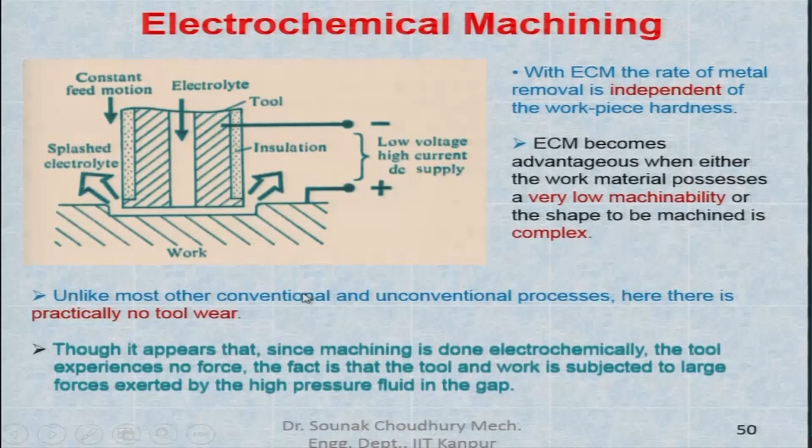This is more broadly the electrochemical machining setup, but otherwise it is the same as shown before. The only difference is that it shows in detail how the electrolyte is recirculated, taken from the tank, and how it is recirculated after being filtered and so on. You can see it from here.

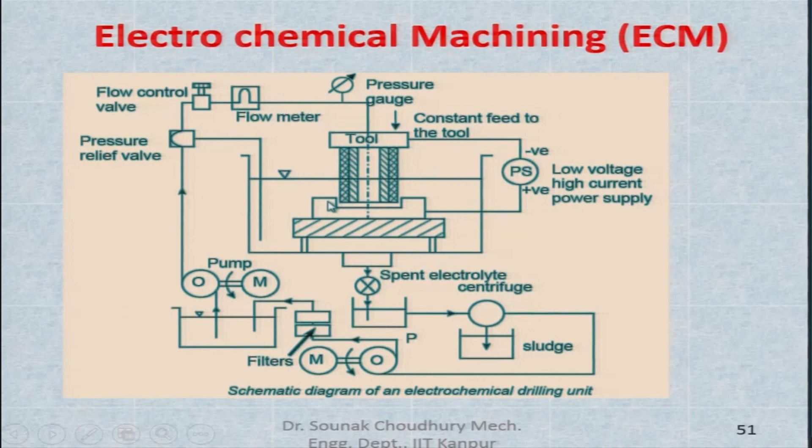Now, process parameters in gist, it is all been said, but this is in gist. Only thing is that electrolyte, we did not say that either you can use sodium chloride, salt water, or NaNO3, sodium nitrate.

Temperature will normally be 20-50 degree centigrade. Flow rate is 20 liter per minute per 100 ampere of current, and working gap is 0.1 to 2 millimeter.

Overcut could be 0.2 to 3 millimeter. Overcut, as I already said, is when the hole is not exactly straight, and the surface roughness is about 0.2 to 1.5 micron. So you can see that the surface roughness is good.

Electrode, that is the tool material, can be copper, brass or bronze, because the tool does not wear out. So it can be a soft material like this.

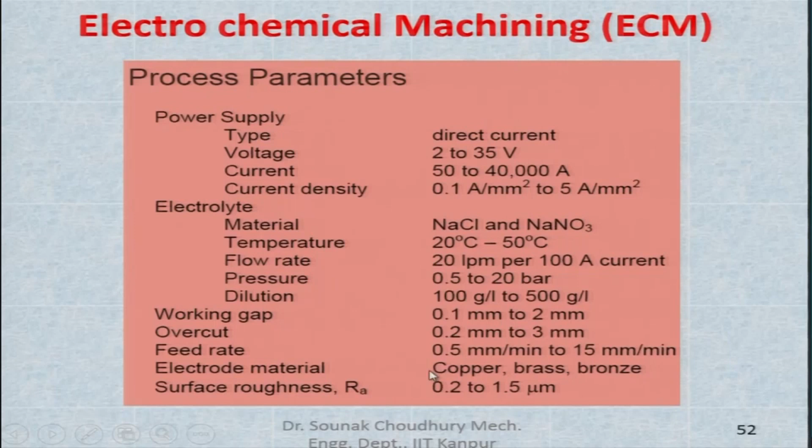Now, electrochemistry, I will not go into very details, this follows Faraday's law of electrolysis. Material removal is proportional to the current, time, and E. So E is the gram chemical equivalent, which is A by Z, and you can find out the material removal of the process.

Since this follows Faraday's law, F is the Faraday's constant, which will be given in the handbook. So if you find out the time, the gram chemical equivalent can be found out from this, the atomic mass of the anode and the valency of the dissolution of the anode.

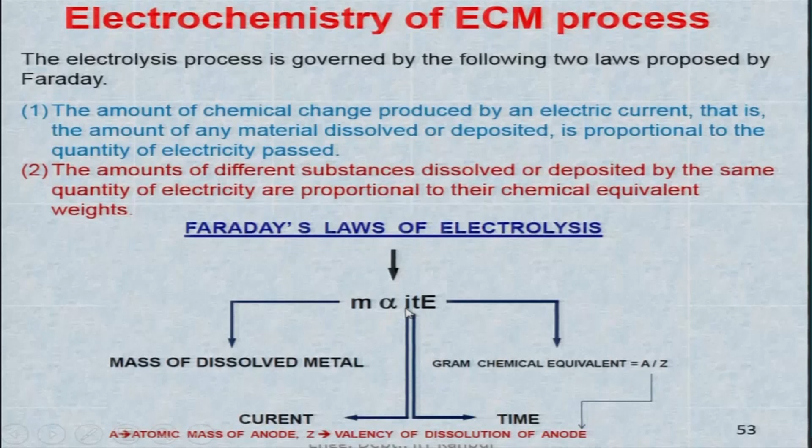So the E will be known, time you know, you can find out what is the current which is going through, and divide that by Faraday's constant, that would be the material removal, and the material removal rate will be I times E divided by F, because this is divided by T. So T is getting cancelled here.

Well, MRR also can be obtained like that, but here it is not very important, we are not going into details. So what is important for you to understand is this is I E by F, that way you can find out the material removal rate.

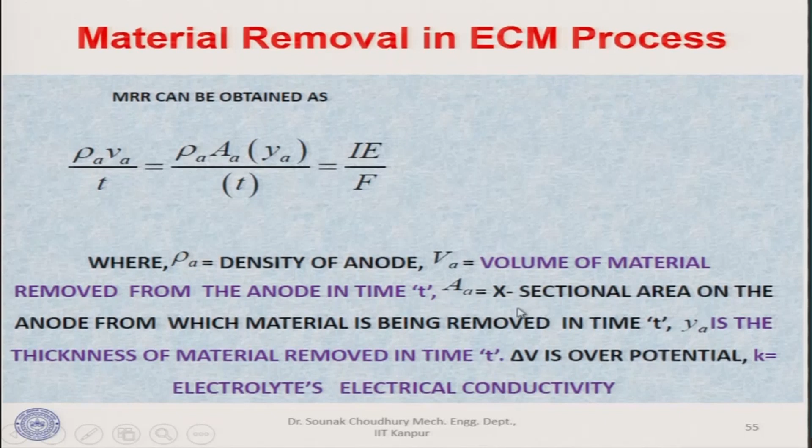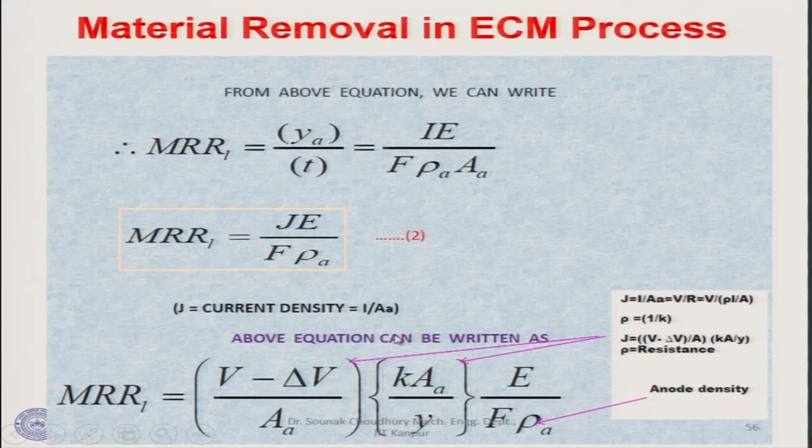This is more important, because through the density also you can find out. So this is the density of the anode, volume of material removed from the anode in time, and area. This in detail you can simplify and finally find out how the material removal rate can be expressed.

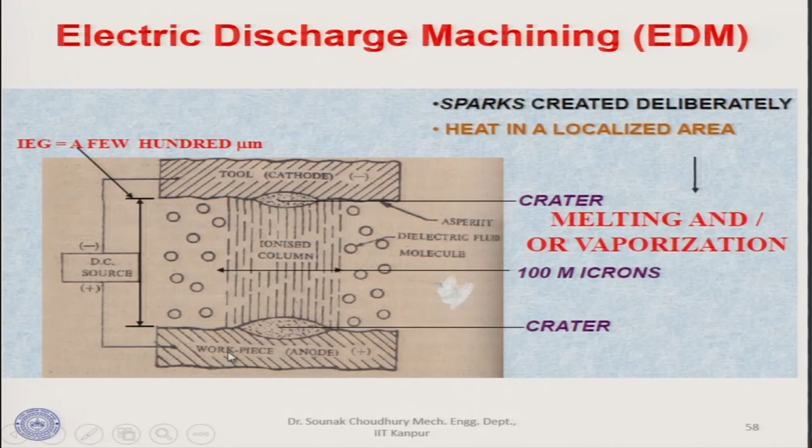Between these two there is an ionized column which makes a flow of avalanche of electrons from the tool to the workpiece side, as the current is passed between the tool and the workpiece. So here is more detail.

What happens is when proper current is established, the electron moves from the tool at a certain speed towards the workpiece. On the way to its movement, this meets the ions of the dielectric fluid or molecules of the dielectric fluid, dividing these molecules into ions and electrons.

So those electrons again rush towards the workpiece, and on the way they meet the molecules of the dielectric fluid, breaking them into ions and more electrons. So that way the electrons keep on getting formed. And ultimately there will be an avalanche of electrons.

And that avalanche of electrons, while moving from the tool to the workpiece side, will look like a spark. So that creates a very high temperature, and that high temperature at a very tiny spot of the workpiece will melt and can evaporate the workpiece.

Mechanics, I have already explained to you, that the local gap between anode and cathode varies due to the asperities. So electrostatic field is created at the minimum gap due to the voltage. What we mean is suppose this is the tool, and this is the workpiece, in between there is a gap, so this distance is the nearest distance.

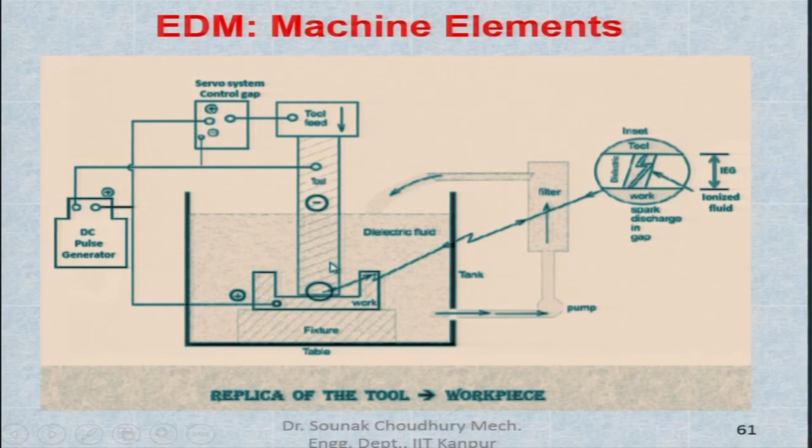Here, if we compare it with electrochemical machining, we have seen that nothing happens with the tool there, no material is removed from the tool. But in the case of EDM, electro discharge machining, the tool wears out because the heavier ions hit the tool. So in that case the tool also wears out, of course much less than the workpiece, but nevertheless, in comparison to electrochemical machining, in electro discharge machining the tool does wear out.

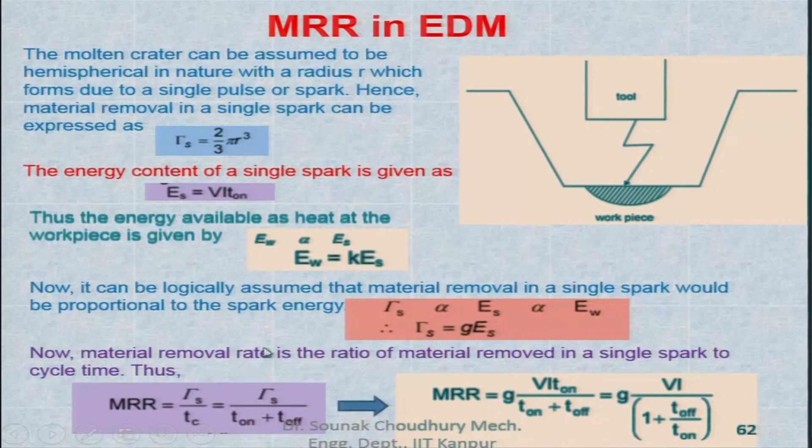Here is the material removal rate in the EDM process. We may not go through this in great detail, but there are simple formulas readily available in the textbooks that can be used for finding out the material removal rate, through the energy available as heat at the workpiece. Finally, you can find the formula through this energy by equalizing, and this formula, with the given parameters, lets you find the material removal rate. We are not going into that detail because it is not under the purview of this course. Here I have already shown this for electrochemical machining.

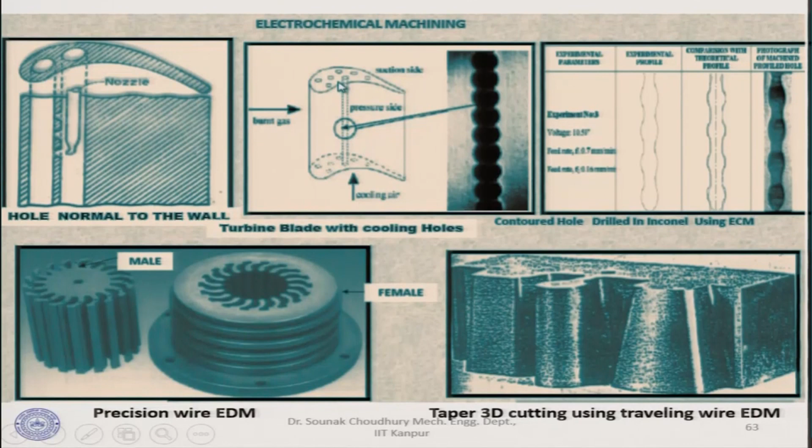Here it is, I am repeating, because for electro discharge machining this is what we can actually get, and this, as I was telling you, is for electrochemical machining. If you remember, I showed you the turbine blades where holes of very complicated shapes can be drilled.

Now the advantages: any material that is electrically conducting can be machined by electro discharge machining. Materials regardless of their hardness, strength, toughness, or microstructure can be easily machined by EDM, because these properties no longer stand in the way—it is only the avalanche of electrons, and the temperature is so high that any material can be melted and evaporated, up to 15,000 degrees centigrade, on a very tiny spot. Therefore, in the vicinity you will not have any kind of heat affected zone, because it happens for a fraction of a second at a very tiny zone, and the material immediately goes off and the spot cools down while the spark happens on another spot, where, as I said, the distance between the asperities will be minimum.

The tool and workpiece are free from cutting forces. Edge machining and sharp corners are possible in the EDM process.

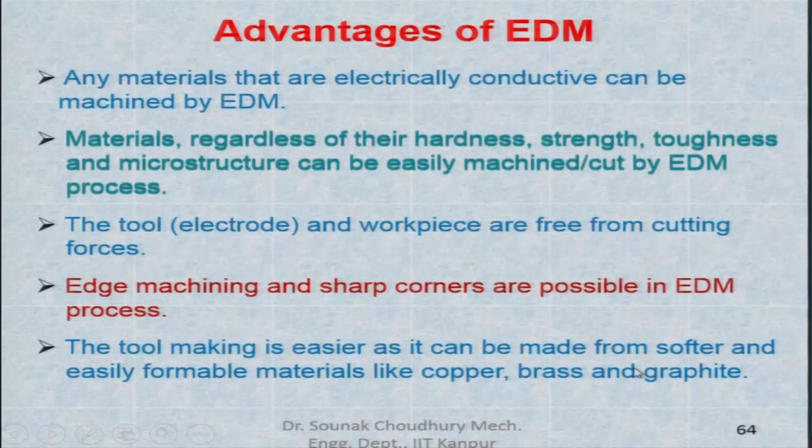Tool making is easier as it can be made from softer and easily formable materials like copper, brass, graphite. Like in case of ECM also we said that copper and brass can be used as the ECM tool material. But here graphite can also be used for making the tool in EDM. These are the other advantages.

The process produces good surface finish, hardened workpieces can also be machined. EDM is a burr free process. When EDM is used there is no burr formed. Hard die materials with complicated shapes can be easily finished with good surface finish and accuracy.

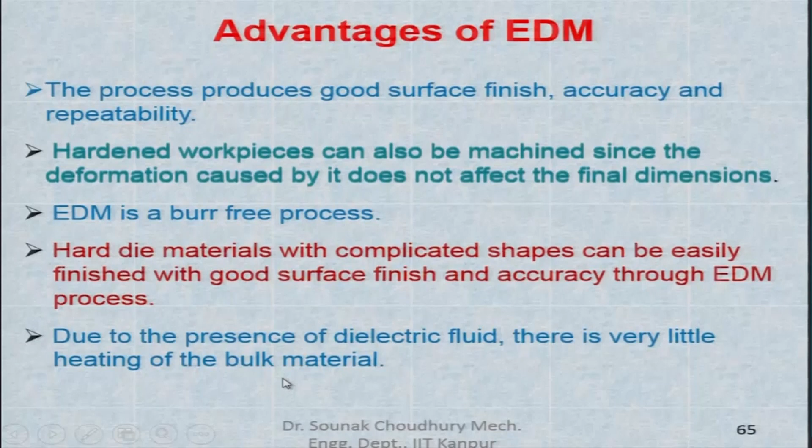Due to the presence of dielectric fluid, there is very little heating of the bulk material. As I said already, because it happens at very high speed, the time taken for the spark to happen is very small, about 1 upon 1000 in seconds.

Limitations of EDM: the material removal rates are low, making the process economical only for very hard and difficult to machine material. It takes longer time, of course. Recast layers and micro cracks are inherent features of the EDM process.

The recast layer is a hard layer, also known as the white layer. This is a disadvantage of EDM, because when the process happens some of the molten material comes and precipitates on the surface, forming this recast layer which is hardened and has to be removed. Now, the EDM process is not suitable for non-conductors.

Rapid electrode wear makes the process more costly. This I have already mentioned, the tool wears out. The surface produced by EDM generally has a matte type appearance requiring further polishing to attain a glossy finish, meaning the surface finish is not very good.

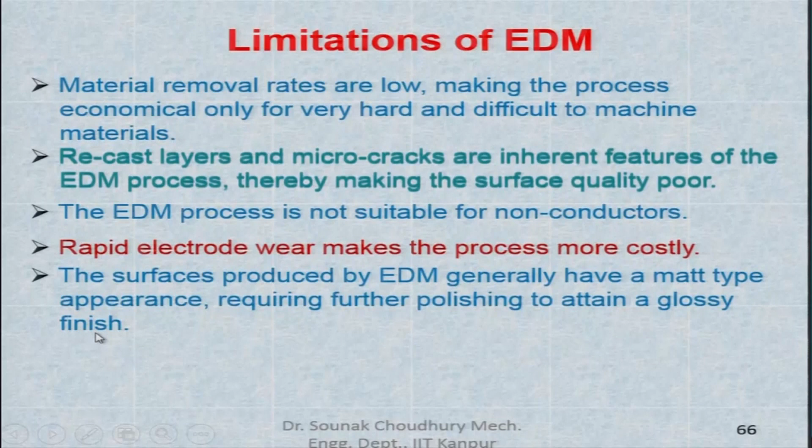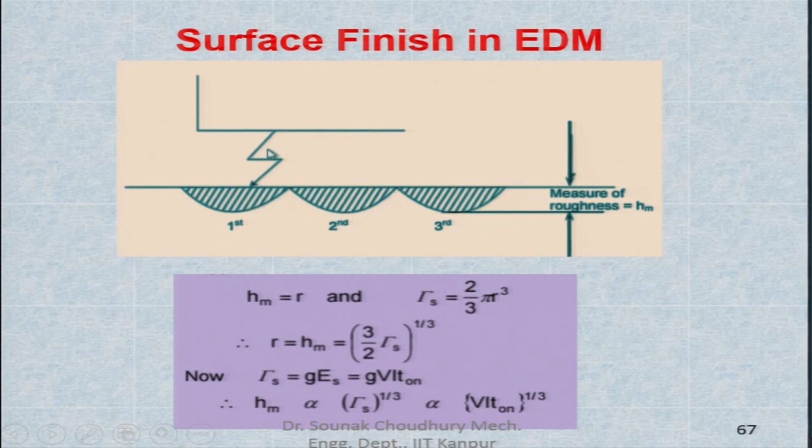This is the surface finish in EDM. This is how the surface is produced, because these are the sparks which happen in spots. This is, of course, highly exaggerated.

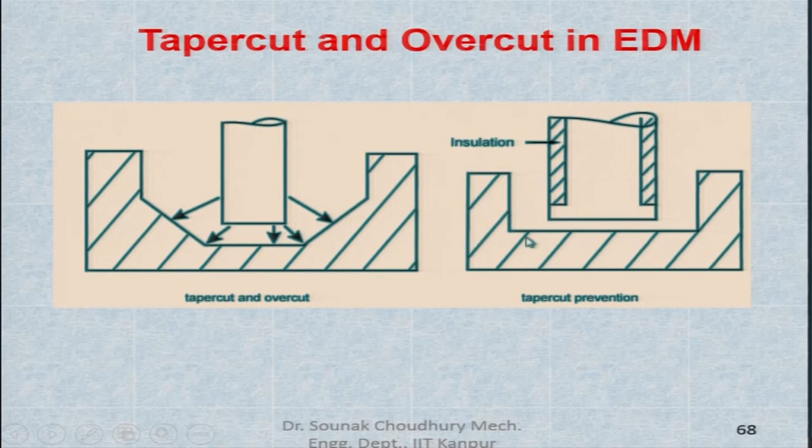Applications of EDM include hardened steel dies, stamping tools, wire drawing and extrusion dies. Then we have header dies, forging dies, intricate mold cavities, and such parts are made by the EDM process. Of course the process is slow, but nevertheless these materials are very hard, very tough.

So by EDM it is convenient to produce these parts. The process is widely used for machining exotic materials used in the aerospace and automobile industries, simply because those materials are hard to machine by conventional machining or any other process. EDM is a non-contact type of machining process.

It is very well suited for making fragile parts that cannot take the stress of machining. As I said already in the introduction, as a drawback of conventional machining, you cannot machine a very fragile part. But here there is no contact between the tool and the workpiece, and therefore fragile parts can be machined.

Deep cavities, slots and ribs can be easily made. Micro EDM process can successfully produce micro pins, micro nozzles, micro cavities and so on.

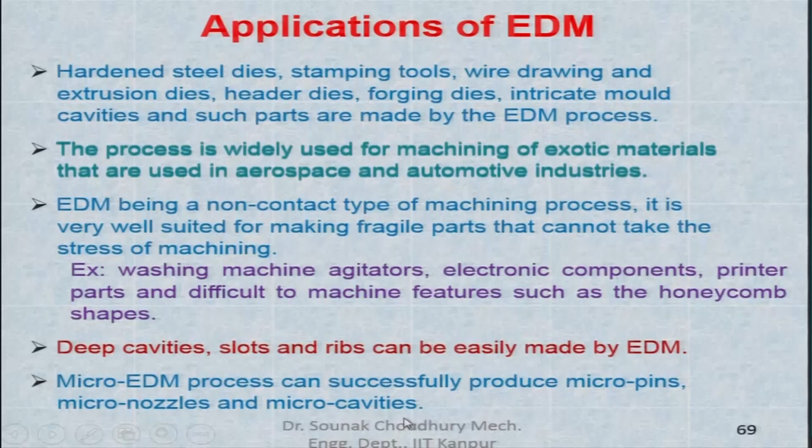This is a type of EDM process called wire EDM, because a wire is used as the tool, and that wire is not stationary but continuously moved. So the wire is used as a tool, and this is the workpiece. In this case, if we move the workpiece or the tool, a contour can be machined, which is difficult in case of normal EDM.

This is a special form of EDM that uses small diameter wire as electrode to cut a narrow kerf. Here you can see there is a spool, and the dielectric fluid is passed through the nozzle. This is the wire electrode, this is the work, and the cutting path is here. The feed motion can be in this axis or that axis, or jointly moved to make a very complicated contour.

Operation of wire cut EDM: as I already told you, CNC can be used for motion control, for example for very complicated shapes. While cutting, the wire is continuously advanced between the supply spool and the take up spool.

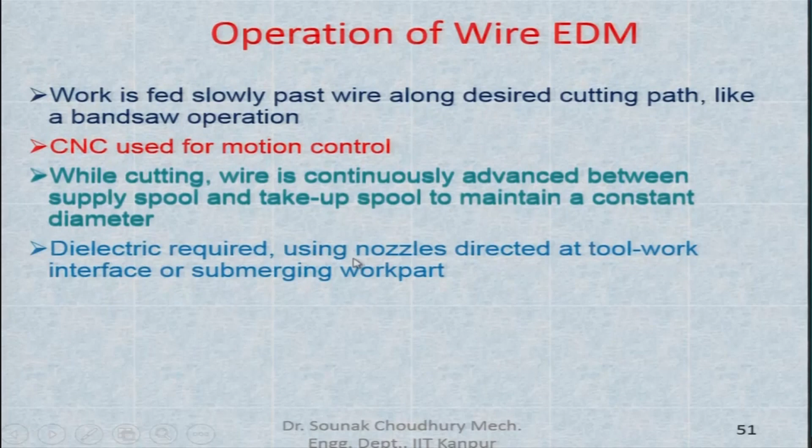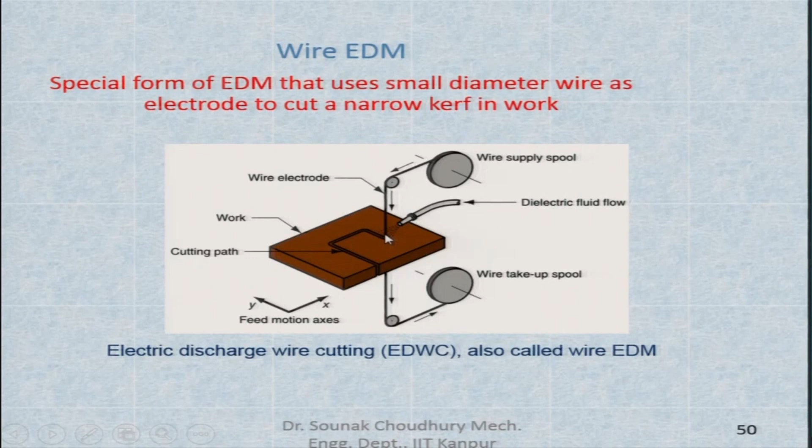The dielectric required is supplied using nozzles directed at the tool-work interface, or the work part can be submerged. So it can be either submerged, or the dielectric fluid can be injected in the working zone. This schematic is an enlarged part showing the kerf. This is the wire, and the slot is being made, you can see this. This is the overcut.

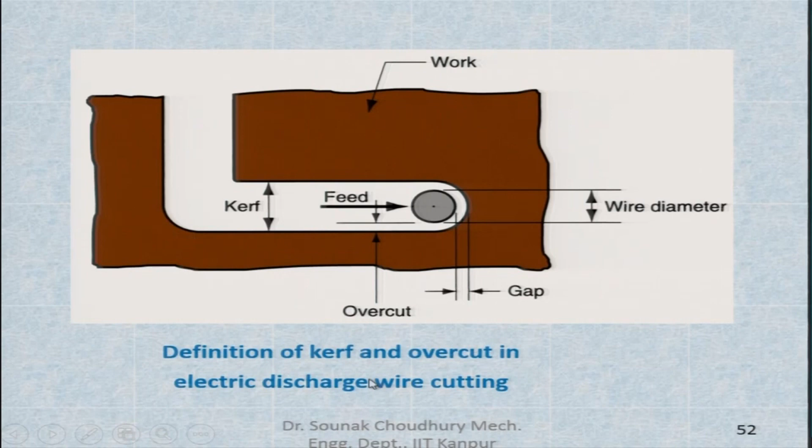Application is ideal for stamping die components. Since the kerf is so narrow, it is often possible to fabricate punch and die in a single cut. From a square plate, if you cut it in the middle with a complicated shape, that is the punch, and the rest can be used as a die. Other tools and parts with intricate outline shapes, such as lathe form tools, extrusion dies, flat templates, can also be made using EDM.

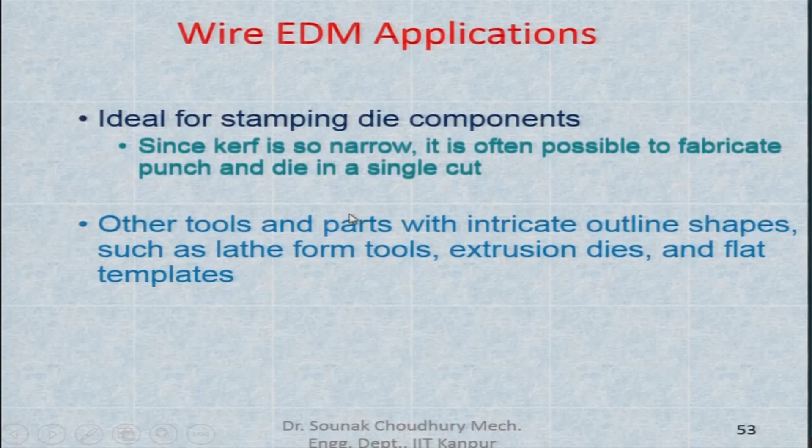Next is the thermal micromachining processes. Electro discharge micromachining is one of them. Now, electro discharge machining we have already seen. Electro discharge micromachining is, in one word, the miniature version of electro discharge machining, because the principle remains the same - how an avalanche of electrons is generated, dividing the molecules of the dielectric fluid into ions and more electrons, and so on.

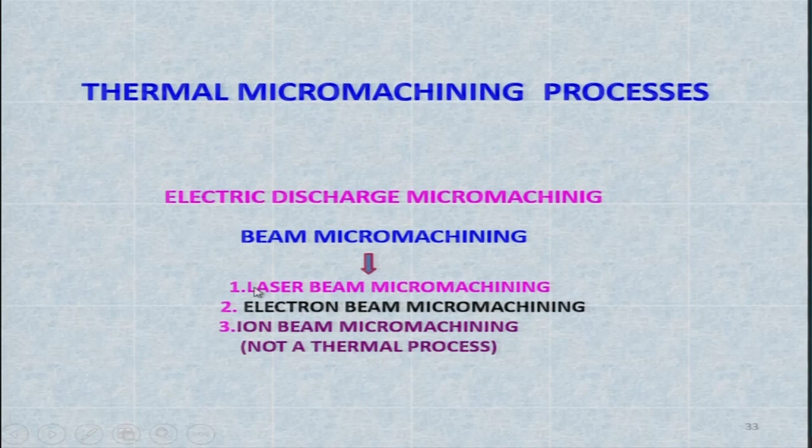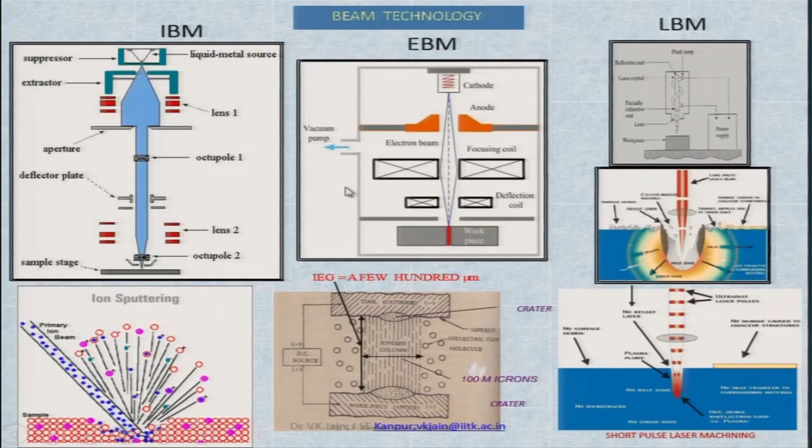I will describe some of them, for example electron beam machining. In electron beam machining, there is an electron gun with a hot tungsten filament that emits electrons. When high voltage is passed through this circuit with the hot tungsten filament, the electron beam is emitted.

That electron beam can be concentrated and moved with the help of the electromagnetic lens and the beam control coil. The electromagnetic lens concentrates the beam of electrons, and the beam control coil moves the beam if a contour has to be machined on the workpiece surface.

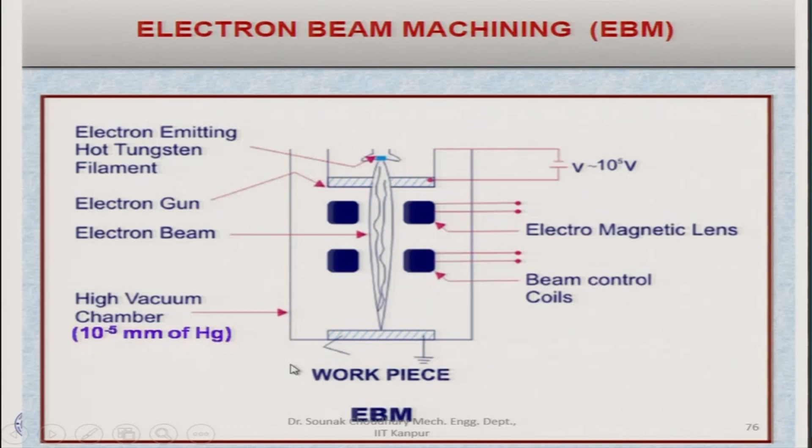Electron beam machining has to be done in a high vacuum chamber, about 10 to the power minus 5 millimeter of mercury, because otherwise the electron beam will collide with molecules of the air and its energy is lost. This is a disadvantage of electron beam machining - each time you make a new part, you have to open the chamber, take out the machined part, put in the new part, and then recreate the vacuum, which is quite high at 10 to the power minus 5 millimeter of mercury. So this process becomes a little inconvenient and expensive.

As I have already told you how it is done, these are the quantitative measures: the electrons are accelerated to about 75% of light speed.

The beam is focused through the electromagnetic lens, reducing diameter to as small as 0.025 millimeter. This is the spot. On impinging the work surface, kinetic energy of electrons is converted to thermal energy of extremely high density, which melts and vaporizes material in a very localized area.

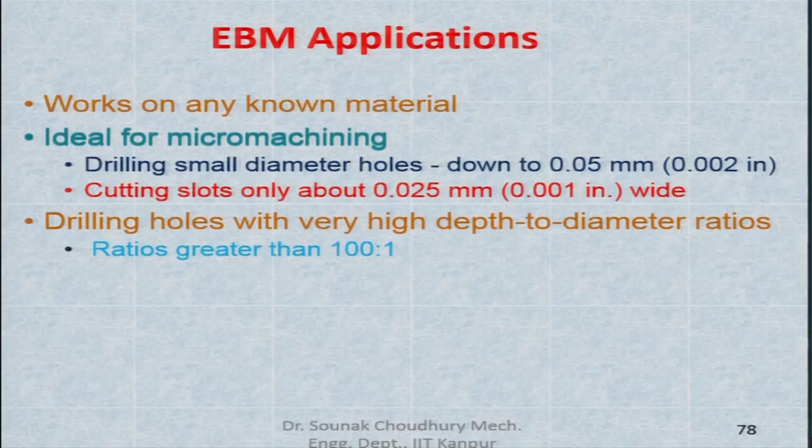This application is ideal for micro machining: drilling small diameter holes down to 0.05 millimeter, cutting slots about 0.025 millimeter wide, and drilling holes with very high depth to diameter ratio, with ratios as big as 100:1. This is an advantage over conventional machines, where it is very difficult.

Laser stands for Light Amplification by Stimulated Emission of Radiation. The laser converts electrical energy into a highly coherent light beam with monochromatic properties, theoretically single wavelength. This is different from electron beam machining in that a laser gun can be used in air, since air molecules do not interfere with it.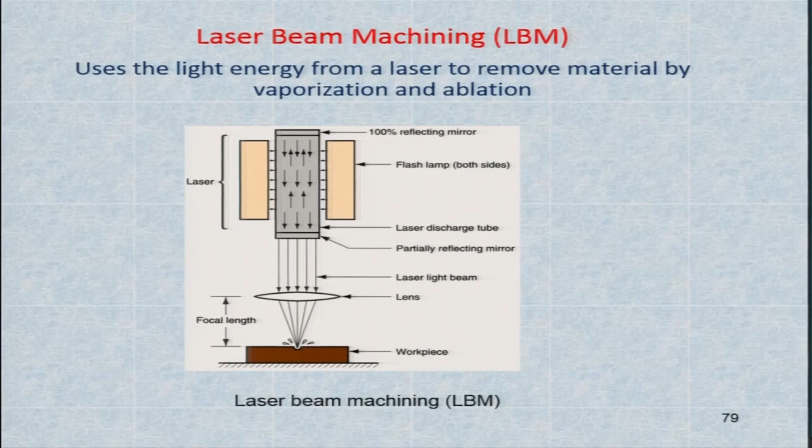This laser light beam is concentrated by the lens at a very tiny spot where the energy is so high that it creates very high temperature, melting and evaporating the workpiece material, irrespective of its strength or hardness.

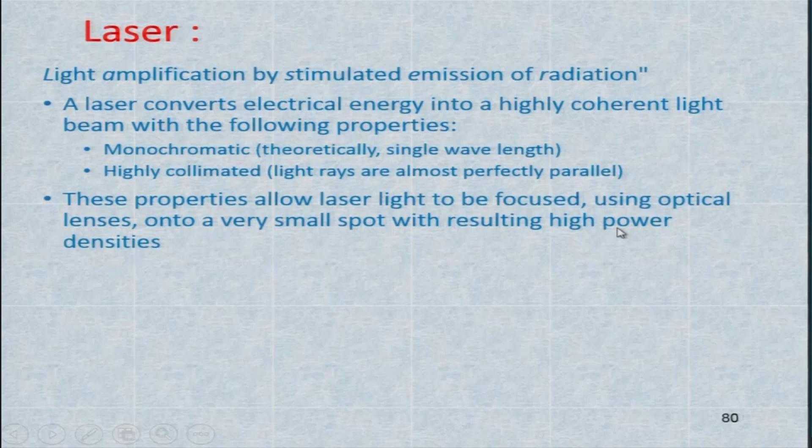These properties allow the laser light to be focused using optical lenses onto a very small spot, resulting in high power densities. Applications include drilling, slitting, slotting, scribing and marking operations.

Drilling small diameter holes down to 0.05 or 0.025 millimeter, generally used on thin stock because such materials are otherwise very difficult to machine, being thin and fragile. Work materials include metals with high hardness and strength, soft metals, ceramics, glass epoxy, plastic, rubber, cloth and wood, all suitable for laser beam machining.

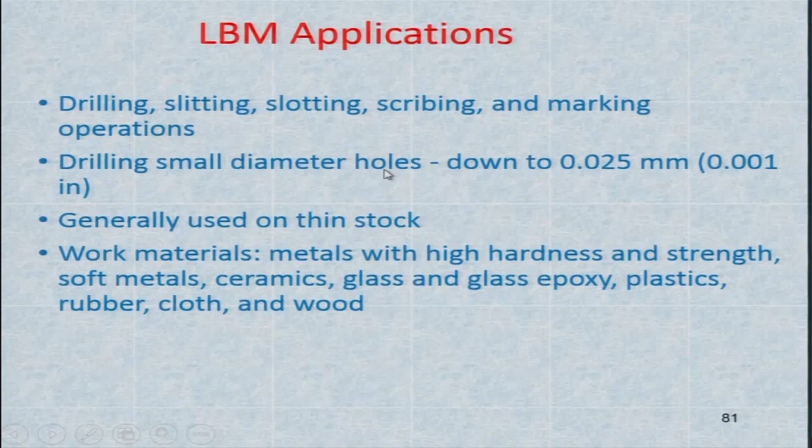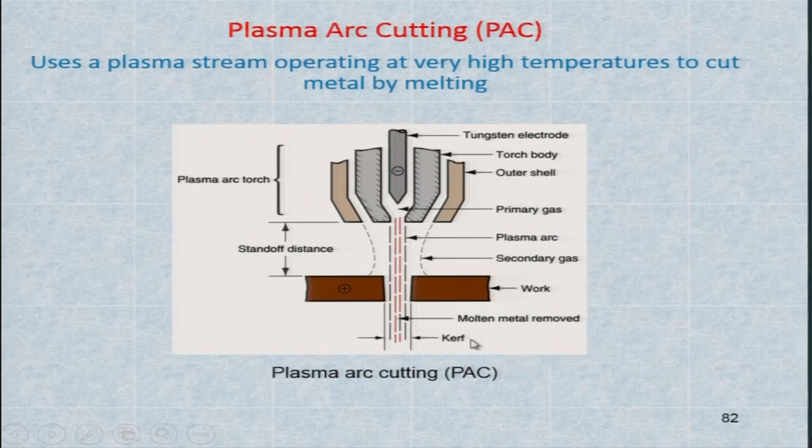Plasma is a superheated, electrically ionized gas, with temperature ranging from 10,000 to 14,000 degree centigrade. At this temperature any material can be melted and evaporated.

It really evaporates the material because of such a high temperature, but this occurs at a small spot. So, once again, in the vicinity there is no heat affected zone.

Plasma is generated between the electrode in the torch and the anode workpiece. The plasma flows through a water cooled nozzle that constricts and directs the stream to the desired location.

So, these are the processes that I basically wanted to discuss with you, to give you a basic idea about unconventional or non-traditional machining.

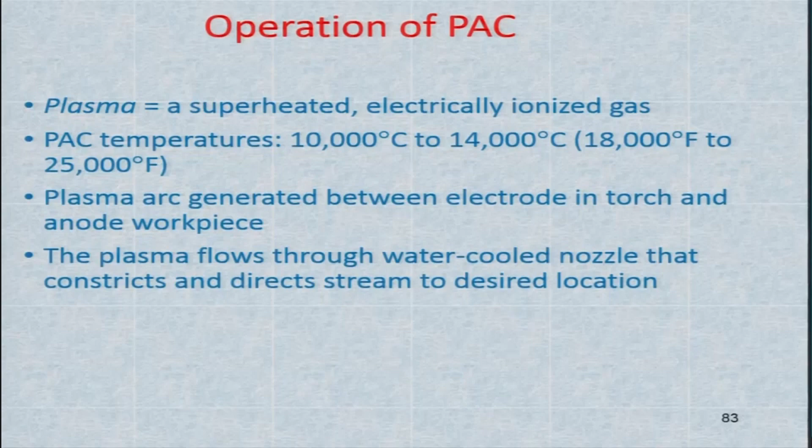Now we will start a new chapter in this lecture series. This topic is computer numerical control. Let me give you a preamble about computer numerical control.

We will be having hands-on training in the laboratory. I will take shots in the laboratory and show you the entire video of how the programming can be made and how the machines can be operated using those programs. I will go into details, and also show you in a PPT separately before we go to the lab.

But here what we are going to discuss is what NC and CNC machines are. What is the difference between them? And why do NC and CNC machines come into the picture?

Why do we need them? In conventional machining machines, there is a prime mover that gives movement to all the parts - it moves the spindle, the lead screw for feed, and the feed motion is taken from the gear train in the headstock. So there is one prime mover, and you don't have much choice of the relative movement between the tool and the workpiece.

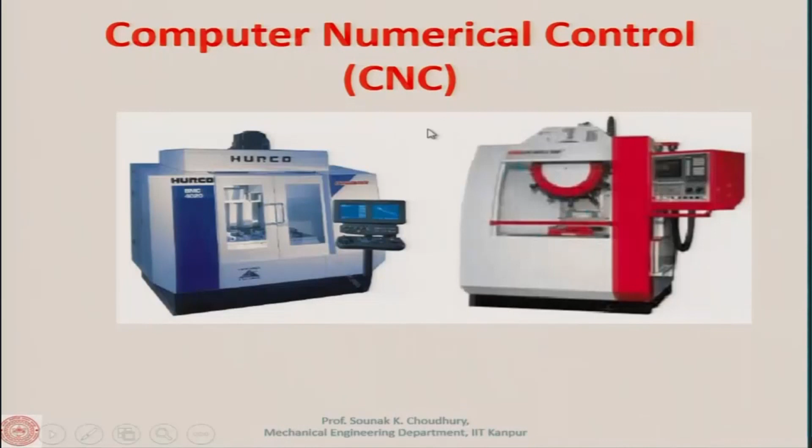So in computer numerical control, the manufacturing operator already has much less responsibility, much less work - he will only be an observer. He will put the numerical data into the numerical controller using the numerical control code, and this will drive the machine to produce the part.

This is the action - the controller is the brain, it will read the data the operator is putting in, interpret what the data means, and by interpreting this, send a signal to the hardware, that is the machine, telling it what to do.

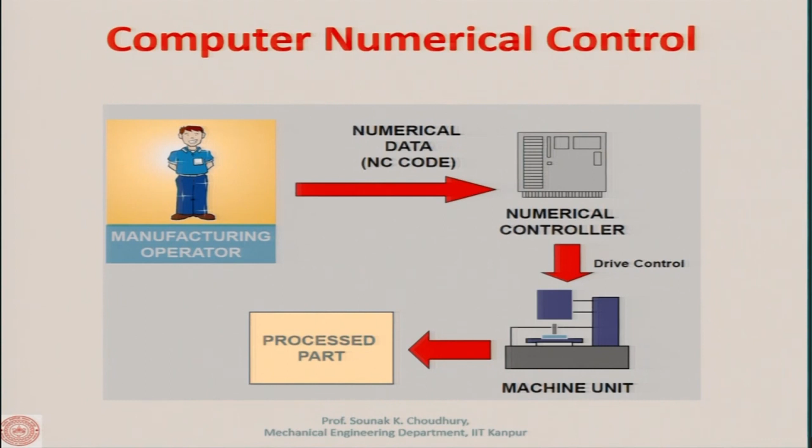Now let me tell you how this flexibility can be obtained. In case of NC and CNC machines, we can have flexibility, meaning we can change the configuration of the parts. This is possible because instead of one prime mover, we can have motors for each of the 3 axes X, Y, Z. Nowadays there are 5 axis machines with more axes, but let us consider to begin with the 3 axis X, Y, Z.

If we have 3 different motors for independent movement of each of these axes X, Y, Z, then we can move them as per our requirement.

We can move them one by one, we can move them simultaneously, or we can move two of them simultaneously to make any kind of surface or relative movement between the tool and the workpiece. That will make the flexibility possible. That means we can have changes in the configuration of the parts, we can make any kind of parts using the same machine, which differs from conventional machines.

If you look at the history, around 1949, John Parsons and the US Air Force defined a need to develop a machine tool capable of machining complex and close tolerance aircraft parts with repeatability. About 1959, the Massachusetts Institute of Technology announced Automatically Programmed Tools as a programming language. They also came up with the concept of computer numerically controlled process and offered automatic programming.

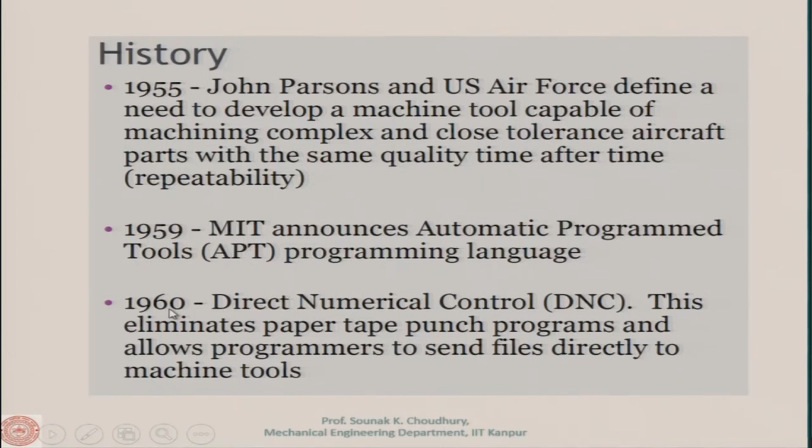This is direct numerical control, and the milestone for this is 1960. Prior to that, paper tape used to be given to each of these machines individually. This was the first step, around 1960, where the program is directly given to the machines. There is a bulk memory program for all the machines, and individually the machines can be given their programs. You do not have to have a standalone system.

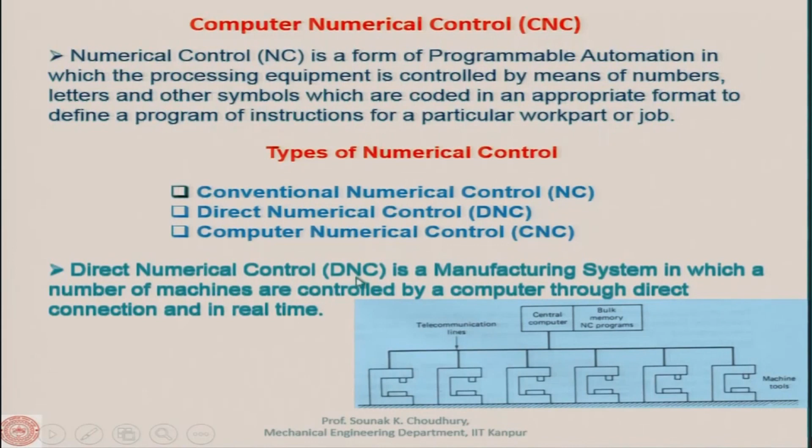Now, computer numerical control, in comparison to direct numerical control, is an NC system using a dedicated microcomputer as the machine control unit. So the machine control unit will have a dedicated microcomputer. The conventional NC controller unit is hardwired, meaning control features cannot be easily altered to incorporate improvements into the unit.

Here what you see is the tape reader, which is used for initial program entry. The tape reader is where the program is made and kept. The program is prepared in a certain fashion.

I will tell you how this program can be made when we discuss part programming. This program is read once by the tape reader.

The NC program storage will store that program when it is fed here, and this is the microcomputer. This is the software function. It will read and interpret what this program says, line by line, and accordingly send the signal to the computer hardware interface and the servo system.

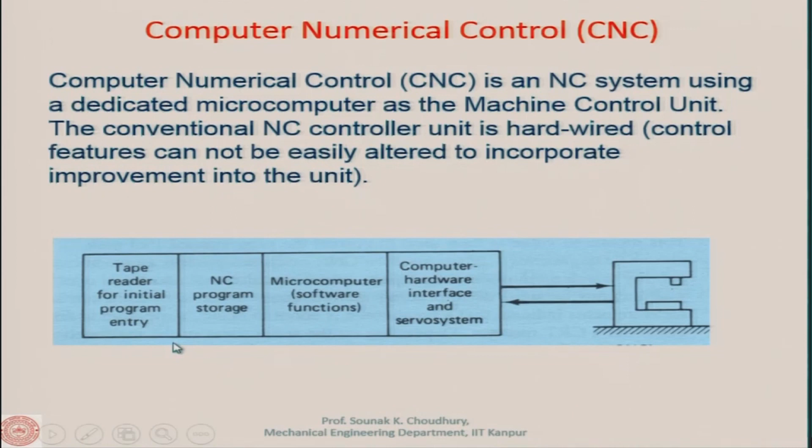Advantages of computer numerical control: it reduces the time for delivery of the part, and reduces the scrap rate of material. Why is the scrap rate reduced? Because here the wastage is very less.

The program is made, and if we are sure it does not have any mistake, because we can actually run the program idly, meaning we can simulate it. I will show you how to simulate it, and then when that program runs in the machine, there will be no fault since we have already tested it. All the parts will be made according to the program and will be identical, so there will be no wastage and the scrap rate will be much less.

This is very important when the raw material is very expensive. If the raw material is expensive, then the scrap rate is very costly. If a part is rejected, we lose a lot of money.

This also reduces the tooling cost, because in CNC the tooling cost is not much. It reduces layout time too. Layout time is planning where the machines will be kept and how, and here that is not required.

It increases the machine and tool life, because everything is optimum. I will show you later how the machine itself can optimally calculate the optimum parameters and always work with them, so the tool life is maximally used, and so is the machine.

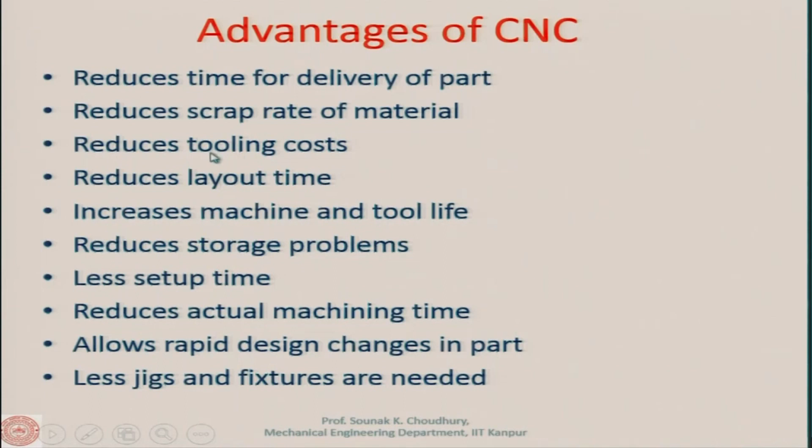Less jigs and fixtures are needed, which, as I said, reduces the tooling cost as well.

Here is the principle I mentioned. Let us say we have the x and y axis, or x and z axis. This is turning: we have a cylindrical job mounted on the 3-jaw chuck, and this is the tool on the tool post. The tool can move apart from the rotation of the workpiece, which is on the spindle, so it will be rotating.

The tool can move along this axis, which is the feed, when the feed is given. This axis in turning is the x axis. And this movement of the tool along the axis parallel to the axis of the workpiece is the z axis.

This is particularly for the turning. I will show you for milling and drilling, but for turning this is the system of axis which is internationally accepted. Mind it that these machines are used all over the world, and we can get a machine from Germany or from USA, and there also they have to use this kind of coordinates, otherwise the movement will be erroneous, it cannot be correct, and the fabrication of the parts can be erroneous.

Now here you see two individual motors: one stepping motor for the movement along the x axis, in this direction, and another stepping motor used for moving the tool on the lead screw, in the z axis. So this stepper motor moves the tool parallel to the axis of the workpiece, and this one perpendicular to the axis of the workpiece.

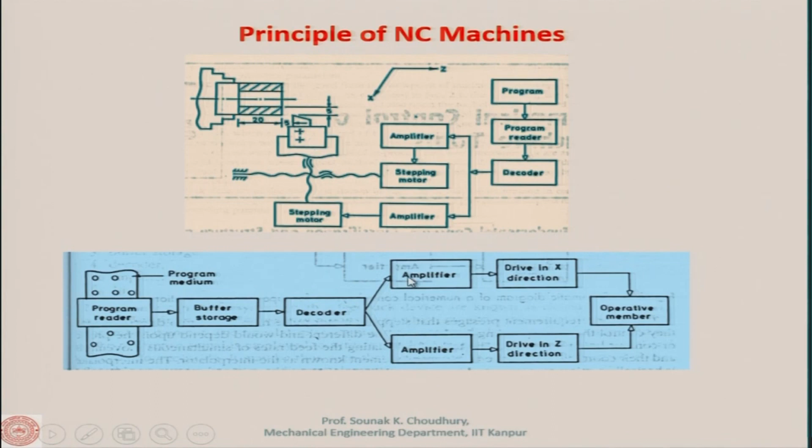Now, major components related to computer numerical control machine tools are the following. Any computer numerical control machine tool essentially consists of these parts. As we have seen, the major thing is the part program—how you will program the part, meaning how you will fabricate a part.

So in conventional machine, what do we do? We make a technological chart. The first stage is facing. Let us take an example: we have a cylindrical job to face, then we turn the cylinder, then we rotate it and fix it from the other end and face it again, then turn it, and probably make steps, grooves, holes and so on. So there is a particular sequence of operations that we write down on paper - that will be the technological chart, which dictates which process is to be performed first.

This is very important when the process is complicated, because depending on the sequence of processes, we have to place the machines. In one part, it may not be only turning - it may involve drilling or milling operations. In that case, the part has to be routed from the turning machine to the drilling machine to the milling machine, depending on the sequence of operations that you have made.

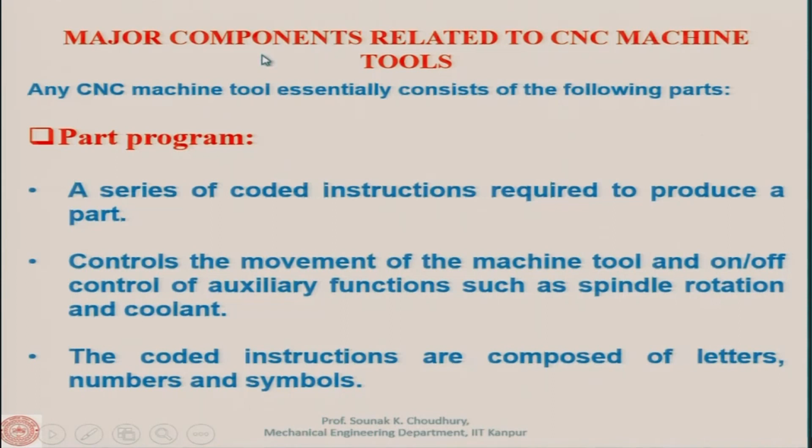They are composed of letters, numbers and symbols, as I said. Next is the program input device - this is also one of the components of CNC machine tools. The input device is the means for the part program to be entered into the CNC control. Three commonly used program input devices are punch tape reader, magnetic tape reader, and computer via RS-232C communication. This last one is the latest, whereas the punch tape reader or magnetic tape are pretty old.